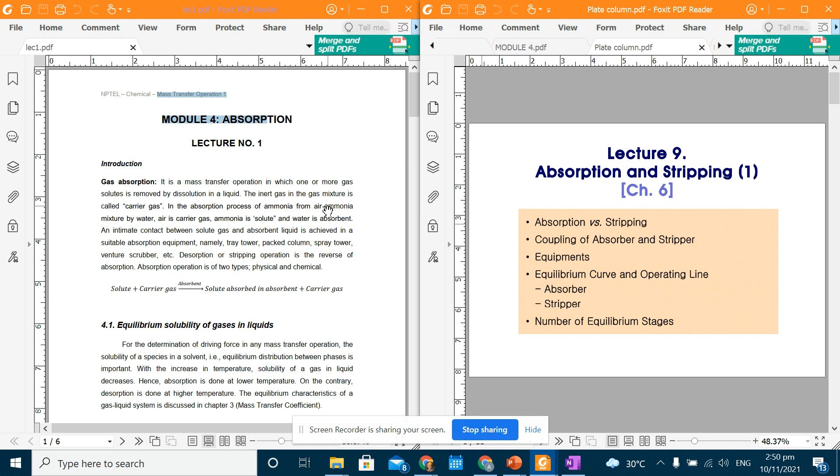So basically absorption is a separation process and a unit process at the same time, no. It is a mass transfer operation in which one or more gas solutes is removed by dissolution in a liquid. So, ibig sabihin, meron kang gas and then kukunin mo yung solute, no? And then i-dissolve mo rin siya sa liquid. That's the basic definition of absorption.

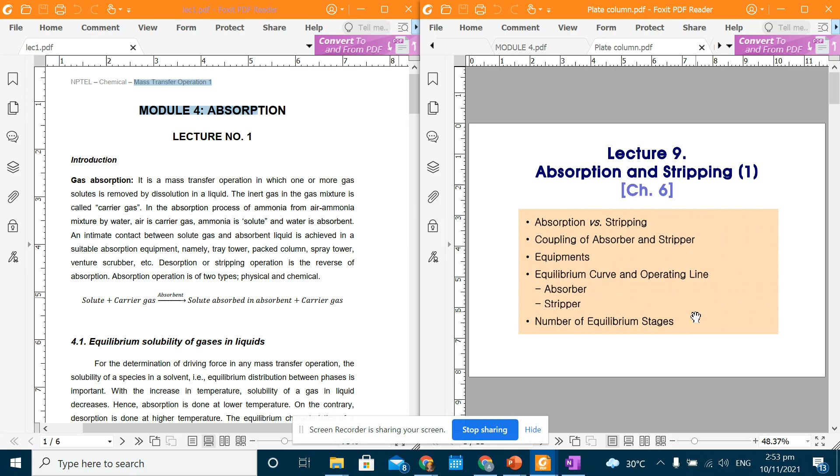So, again, same lang to sa sinabi ko kanina that absorption can also be termed as gas absorption, gas scrubbing, or gas washing. No? So, a gas mixture is contacted with liquid, which is the absorbent or the solvent, to selectively dissolve one or more components such as the solute or the absorbate. So another term for solute is the absorbate, by mass transfer from gas to liquid.

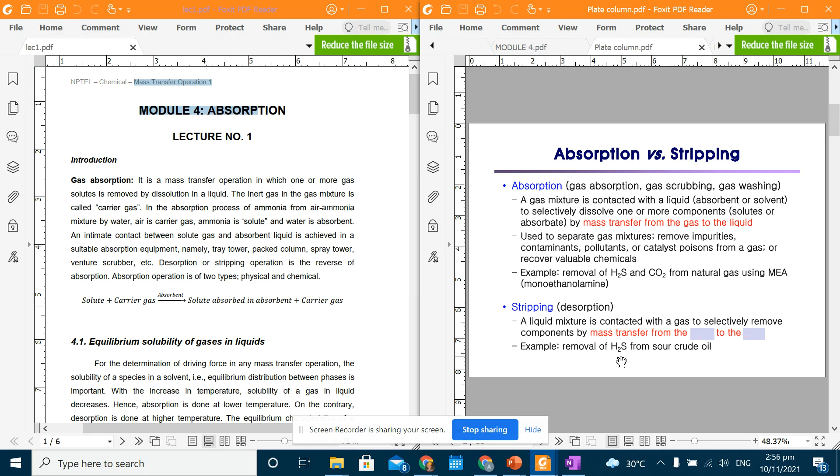Sa stripping naman, again, the liquid mixture is contacted with a gas to selectively remove components by mass transfer from the liquid to gas. No? Ito naman, sa stripping from liquid papunta kay gas. For example, removal of H2S, no, sulfide, from sour crude oil. No?

So absorbers are frequently coupled with strippers to permit regeneration or recovery and the recycling of the absorbent. So for example, here, you have a flue gas containing the solute, and then ipapa-absorb mo siya. The flue gas will enter here, then will go out at the top. Ngayon, yung solute mo will come in contact dun sa absorbent mo, which is usually liquid, and then makukolect siya dito. Okay? So the liquid that will be collected here will contain the solute na.

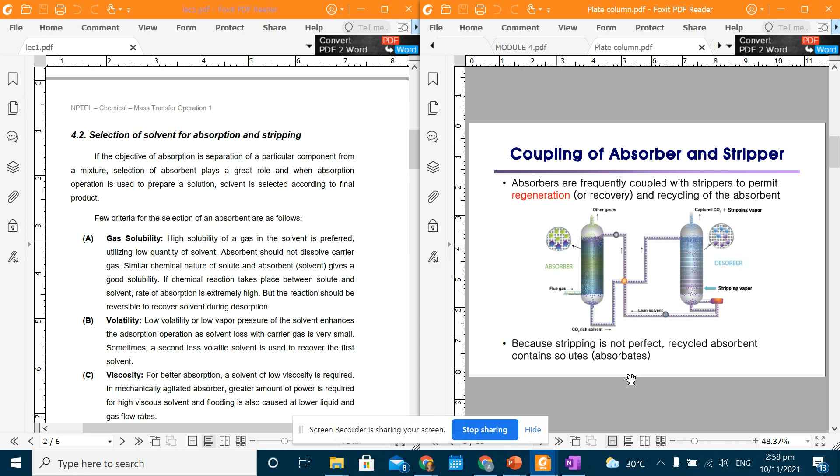Okay, so how do we quantify the effectivity doon sa pag-absorb mo or pag-strip mo? So, we have this absorption factor and stripping factor na tinatawag. This is just parang introductory lang sa absorption and stripping natin. For example, if you have absorption, it's a plate column actually. Ibig sabihin, meron ka mga plates dyan. It's a plate column. And then you have a feed gas.

Always si feed gas, it comes from the bottom of the column. So bottom of the column, doon pa si feed gas. If the feed gas is 25 degrees Celsius and at 1 atm, ito yung parang mga amounts ng different constituents mo, no? So argon 6.9, oxygen 144.3, nitrogen is 536, the water is 5, and the acetone is 10.3.

So automatically we can just say that this is air, no? Meron kang oxygen and nitrogen. So this is presumably air, and then meron kang water. So sa air mo, it has water vapor, and yung solute mo is the acetone. Naka red box na rin siya, acetone.

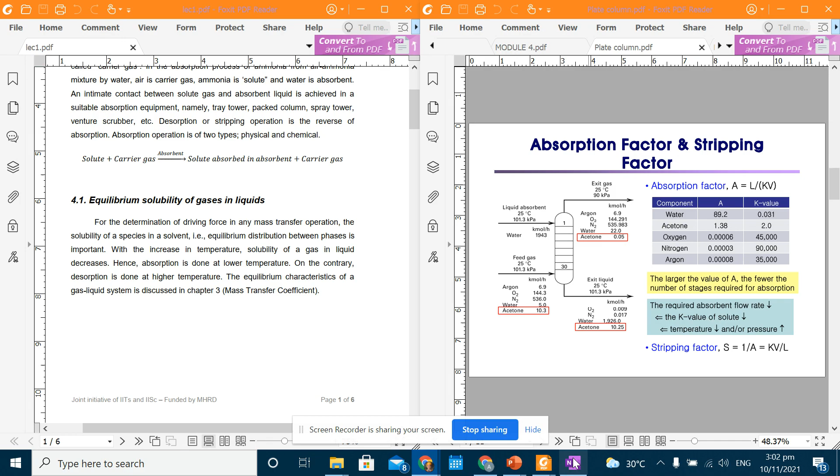Okay, for example, here, the total natin dito, the molar flow rate, or the L, the molar flow rate of the liquid is the sum of the liquid. And that sum of the liquid is around 702. Pag i-add mo, 702.5. This is in kilomole per hour.

And then what goes up here is, again, this is L0. Then this is the L1. Later on, ipapakita natin yung notation natin dito, ha. Hindi ko na nalalagyan. So, L here is equal to 704.2.

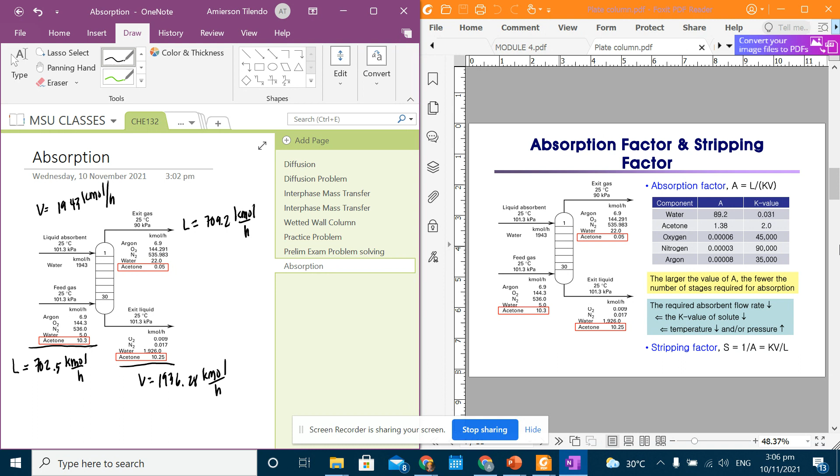So ano ba yung mga equipment natin? Meron tayong mga various types of tray or plate towers for absorption natin. Meron tayong tinatawag na tray tower. So si tray tower, also known as the sieve tower. Hindi kasi maka-annotate sa PDF eh. So, the tray tower, also known as the sieve tower, i-note lang dito.

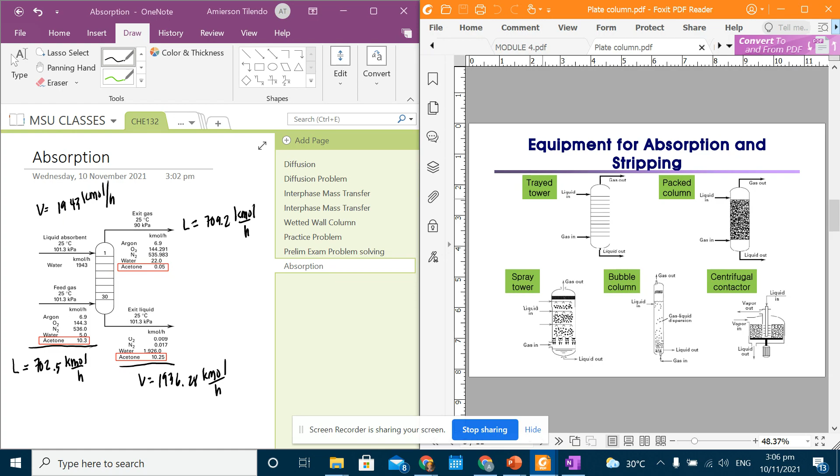Yes. And then, meron tayong packed column. Babalikan ko pala. Si tray tower is also known, mali pala yung sinabi ko kanina, as plate column. It's because it's a column consisting of different plates. So this is first plate, second plate, third plate, fourth plate, and so on and so forth. So plate column siya. Si packed column naman is also called packed tower.

Packed tower. So ang pinagkaiba nila, automatically ito, meron mga different plates dyan na dyan papasok pababa si liquid mo, si gas mo pataas. So kung mas marami kang plates, mas marami kang chances, opportunity para mag-contact si liquid and gas. Yun yung pinaka-importante sa absorption. Dapat mabigyan mo ng opportunity na mag-come in contact si liquid pati si gas.

Otherwise, wala kang mass transfer na mangyayari. So, ang kailangan mo lang talaga, makapag-come in contact. So, kung marami kang plates, mas maraming chances na mag-come in contact. Okay? So, we also have packed tower, also known as packed column.

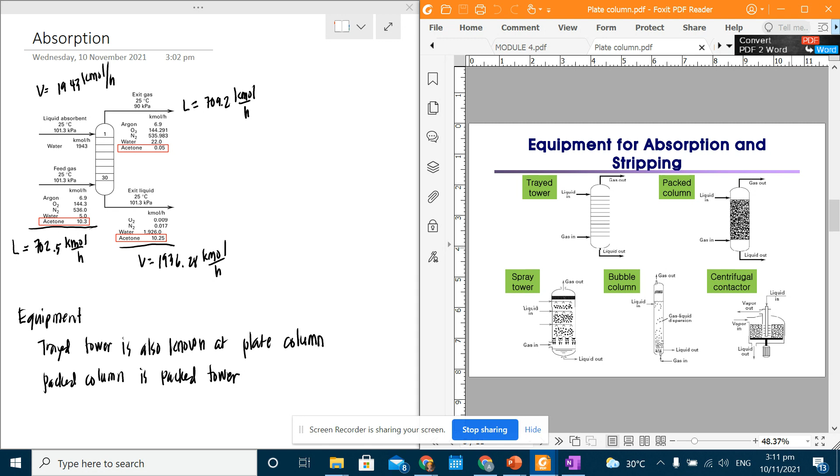Ang tinitingnan naman dito ang height, kung gaano kataas yung packed tower mo. This one, kung gaano kataas to. So kung gusto mo ng mataas na packed tower, marami kang makaka-come in contact, and then mas marami kang makukuha na solute sa liquid mo. No? So it really boils down to the cost, kung saan mas barato. Okay, sir.

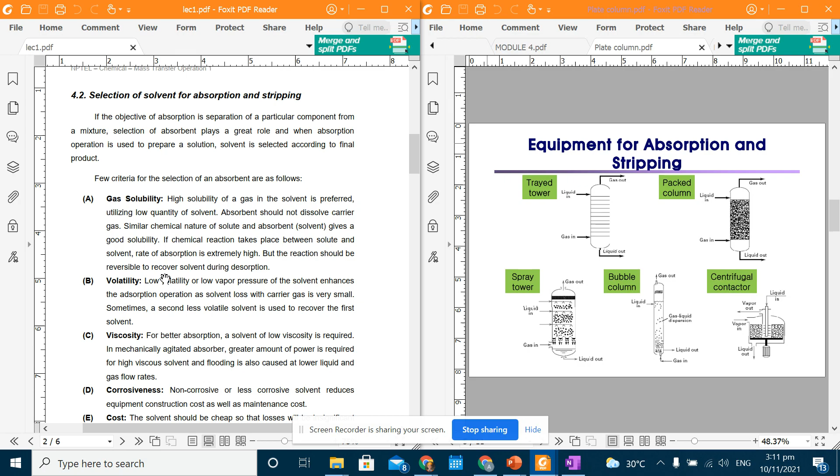Yes. Anyway, this is one of the selection, no, to give you the idea. Later on, i-discuss natin to. If the objective of absorption is to separate a particular component from a mixture, selection of the absorbent plays a great role. And when absorption operation is used to prepare a solution, solvent is selected according to the final product. So ito yung mga criteria na kailangan natin sa pag-select ng absorbent natin.

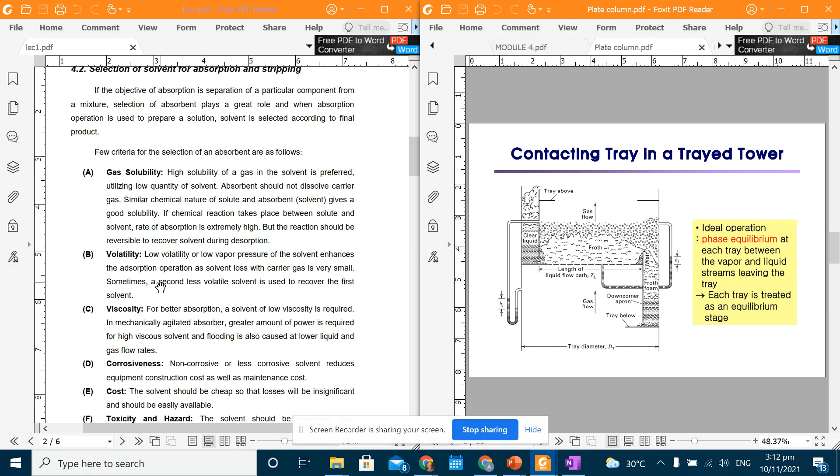For example, yung gas solubility niya, high solubility of the gas in the solvent is preferred. Dapat yung solute mo madali siyang ma-absorb doon sa solvent mo. Dapat low volatility siya, no? Hindi siya easily nag-volatilize, otherwise sasama siya sa gas stream mo going outside.

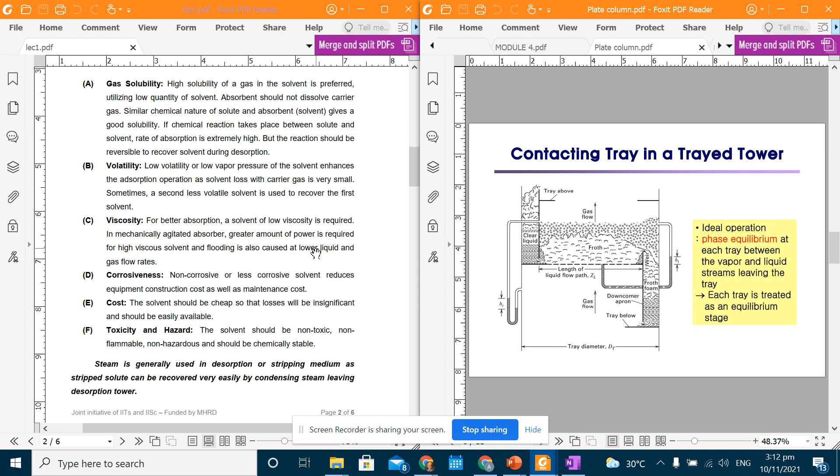Dapat low viscosity siya. Why? It's because kung yung solvent na gagamitin mo, mataas yung viscosity niya, mahirapan siya mag-flow down. Mahirapan siya mag-flow down, so naapektuhan doon yung come in contact ni liquid and the gas mo.

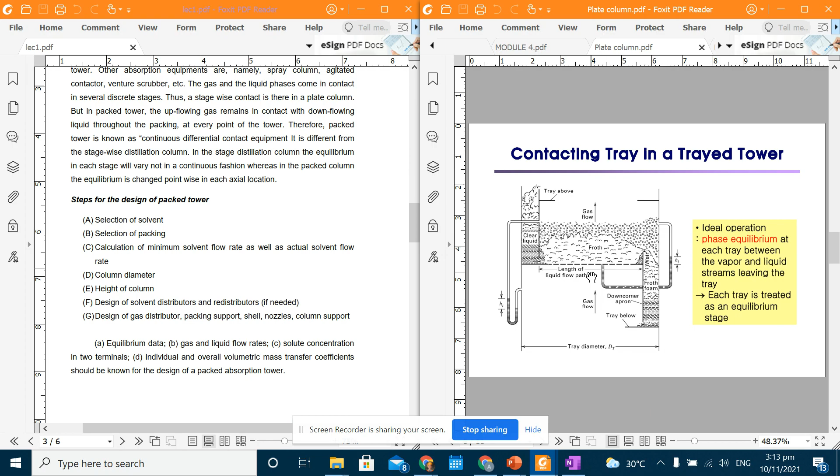Dapat non-corrosive siya kasi this equipment needs very high strength materials. And yung mga high strength materials natin are metals, and these metals are very prone to corrosion. So kailangan yung solvent mo hindi siya corrosive. Then dapat yung cost ng solvent mo mababa lang, cheap lang siya. Toxic and hazard: since it is industrially scalable, dapat maliit lang yung toxicity and hazards ng solvent. Okay, so yun yung mga criteria na ginagamit natin sa solvent natin.

To give you a more visual description doon sa nangyayari sa tray tower natin. Okay, so we assume that the liquid comes from the top. So ngayon, yung clear liquid mo will go here, and then yung gas mo will flow from the bottom to top. So since yung mga tray tower mo ay meron siyang mga holes here, no?

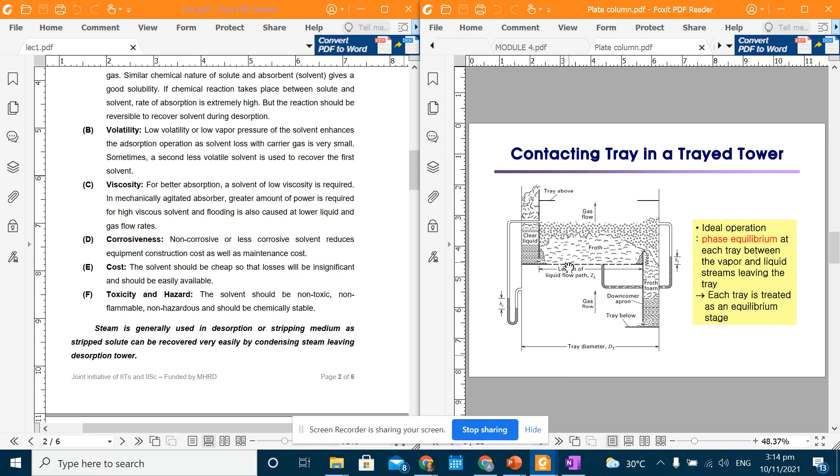Meron siyang mga holes. Okay, so itong mga holes na to, it usually ranges from 3 to 12 millimeters in size, no? Nasa Geankoplis yan actually. Or usually nasa 5 millimeters. So, unahin natin si tray tower.

Let's give a definition and description of the plate column. So the plate column will look like this, and it has holes. The holes are usually 5 millimeters in diameter.

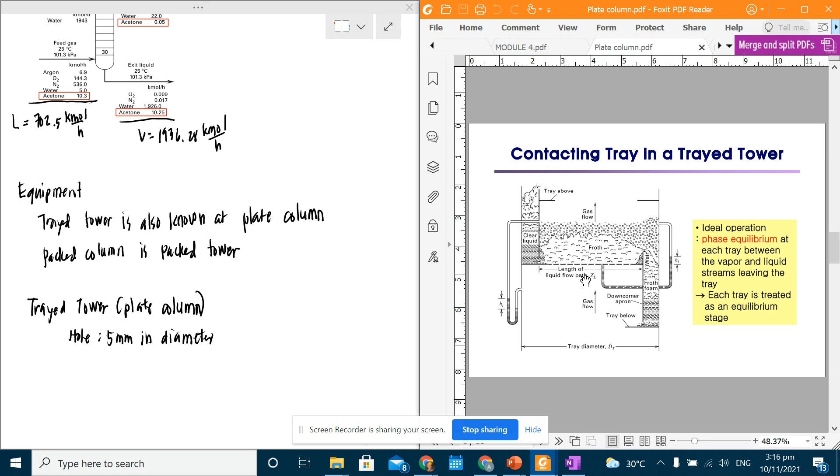It goes down, and then the liquid goes down, hitting the next tray, the second stage or second plate below. And it keeps going down, down, down.

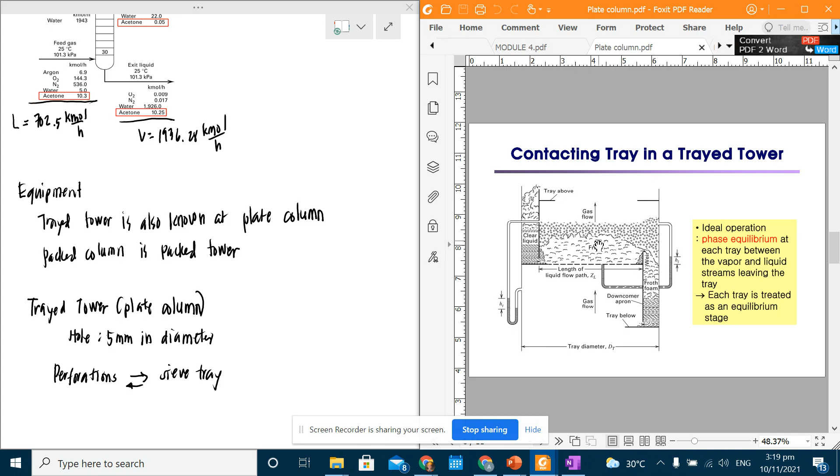The overflow liquid flows into the downspout to the next tray below.

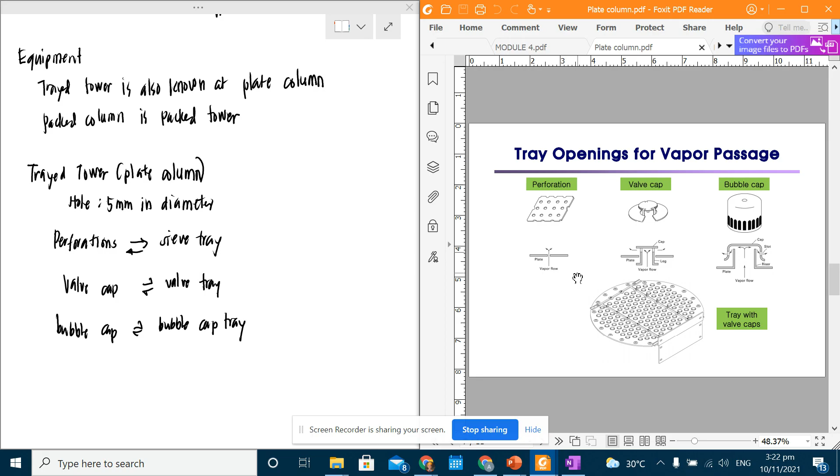In the periphery of each cap, dito in the periphery or parang in the perimeter of each cap, nagkakaroon ka ng bubbles na pwedeng mag-come in contact into the liquid. So yun yung mga tray openings natin sa plate column natin.

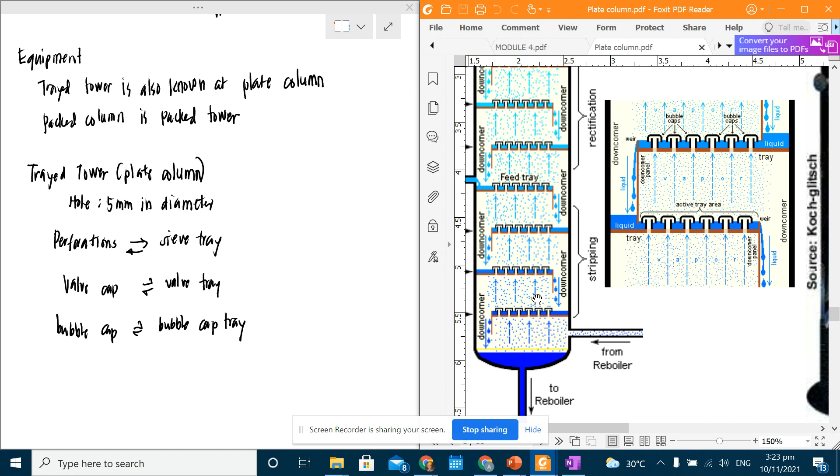So this is also another viewpoint doon sa bubble cap natin. Saan ba dito? This is the liquid and then this is the feed na vapor mo goes up. Yung pag goes up niya, tatama siya dito sa mga bubble cap, and then magka-come in contact siya sa liquid. Magkakaroon ka ngayon ng contact ng liquid and vapor here. Meron kang formation of bubbles on the periphery, sa gilid ng mga bubble cap. And then goes up, and then so far yung liquid mo goes down.

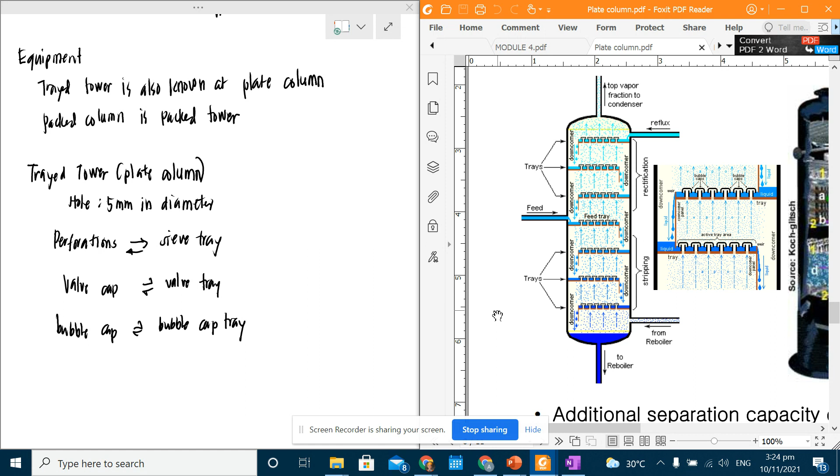Okay, so ano pa ba? This is a parang more detailed na itsura nung plate column natin.

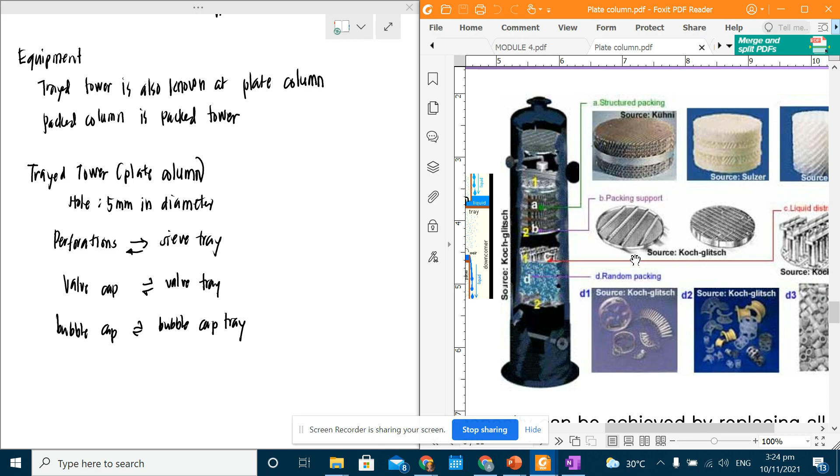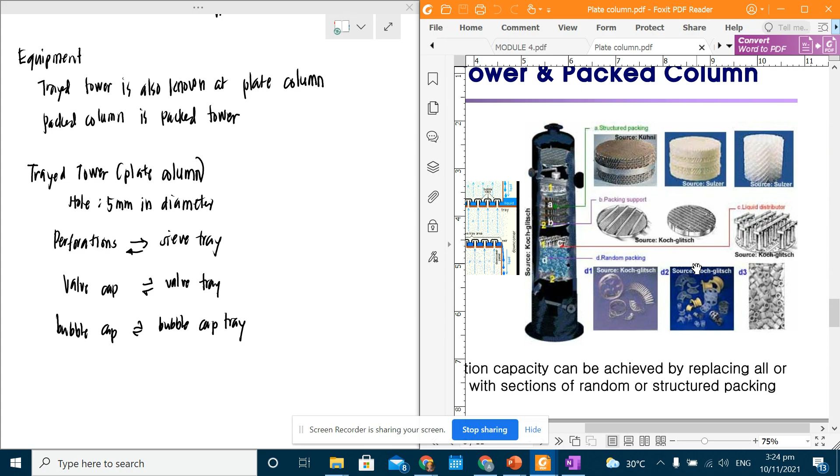And then this is the pack tower. Ito naman is pack tower. Hindi, pack tower ba to? Yeah, it's a packed column. So meron kang packing, na ibig sabihin ng packing, yung mga materials mo, instead of plates, nagkakaroon ka ng mga materials na kung saan doon nagtatama-tama si liquid and si vapor. So these are the common materials na ginagamit sa packing.

Additional separation capacity can be achieved by replacing all or some of the trays with sections of random or structured packing. So instead of the trays, you have a structured or random packing. Pero hindi mo naman pwede na parang i-condense, i-pack talaga yung mga materials mo kasi hindi dadaan si air mo or si vapor mo. Yung vapor pressure mo, yung pressure drop mo, sobrang laki nun.

Kailangan yung parang there is a dichotomy kasi sa packing na kailangan papass through si vapor or si gas doon sa packing mo. At the same time, meron kang contact ng liquid and si gas mo. It's quite complicated to think na ang purpose mo is lalabas si air or si vapor at a minimal pressure drop. Pag sinabi nating minimum pressure drop, mabilis yung pag-pass through ng air. Yung pressure dito must be somehow almost equal sa pressure dito, maliit lang yung pressure drop mo. That's a very good indication na the packed column is efficient. At the same time, kailangan mo magpa-come in contact si vapor or si gas kay liquid. So there is a parang contrasting idea there.

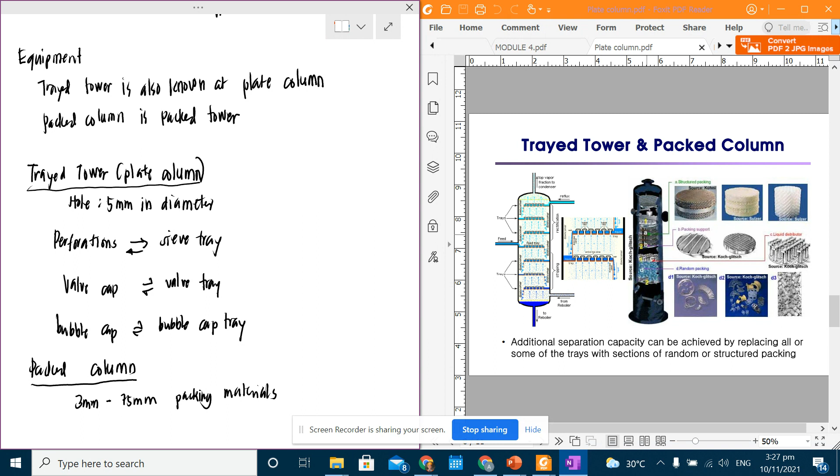Most tower packings are made of inert, cheap materials such as clay, porcelain, graphite, and plastic. Void spaces of 60 to 90% are characteristic of a good packing, so our packing materials should have large void space. As much as possible, air should be able to pass through without getting blocked. Once the air gets blocked and cannot pass from the bottom, the packed tower is not good. So we need materials that are loose enough to allow air to pass through.

The packing permits relatively large volumes of liquid to pass countercurrently to the gas flow through the opening with relatively low pressure drop for the gas. That's what we want here, a relatively low pressure drop. Once the pressure drop is large, it means there is blockage in the packed column when the pressure drop is high.

The same type of packing is also used in vapor-liquid separation processes such as distillation. Okay, so what does the usual appearance of these look like?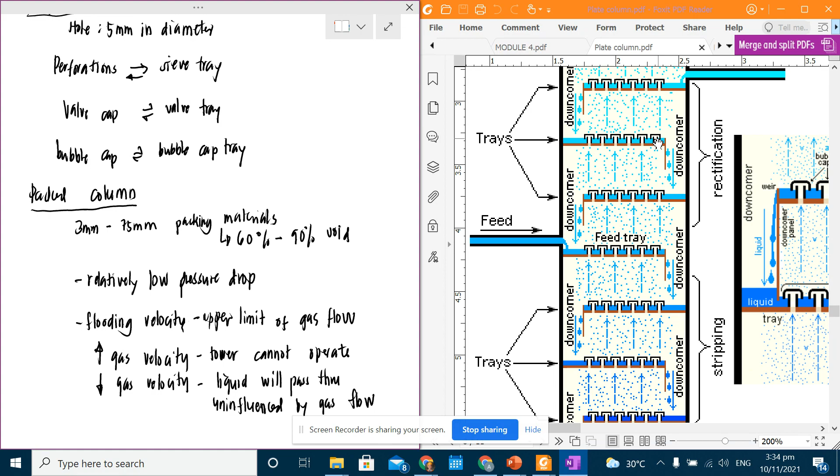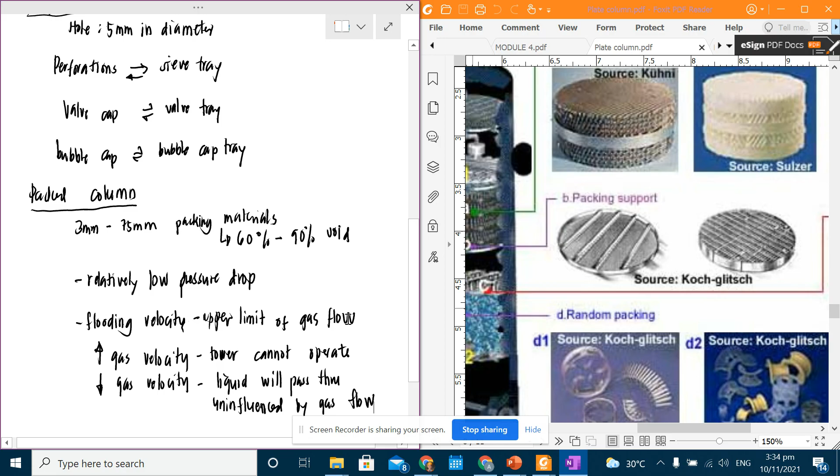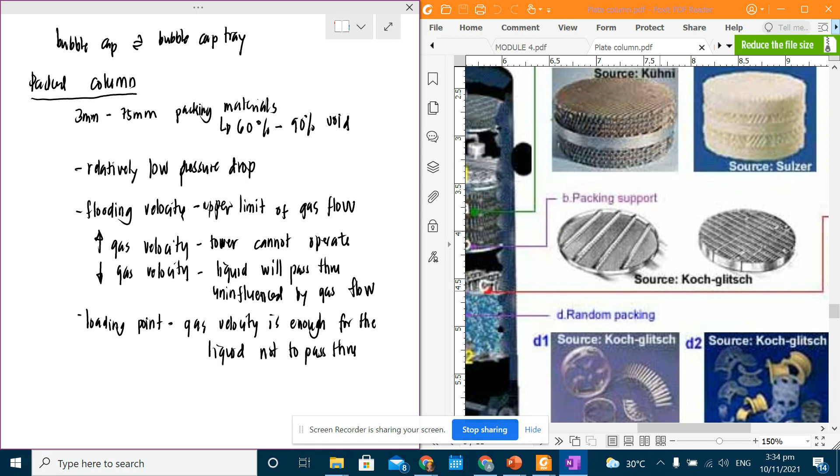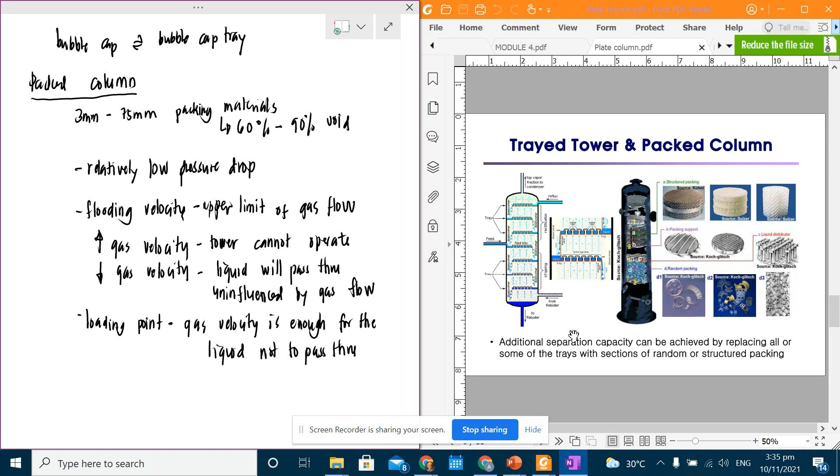As the gas flow rate increases to what we call the loading point, the gas starts to hinder the liquid downflow, and local accumulation of pools of liquid starts to appear in the packing. So we have what is called the loading point, where the gas velocity is just enough for the liquid not to pass through automatically, so that there is still contact happening. That's the essential thing we have to remember about tray towers and packed columns.

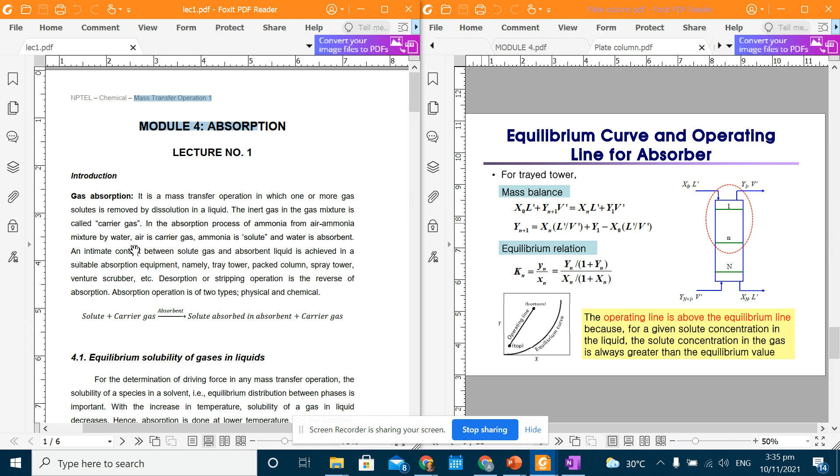So, design of a single stage countercurrent packed tower. Later on, or next week na lang, natin i-discuss si equilibrium curve and operating line of the absorbers. Let's just look lang doon sa mga concept lang natin, no? Yung mga concept lang natin here.

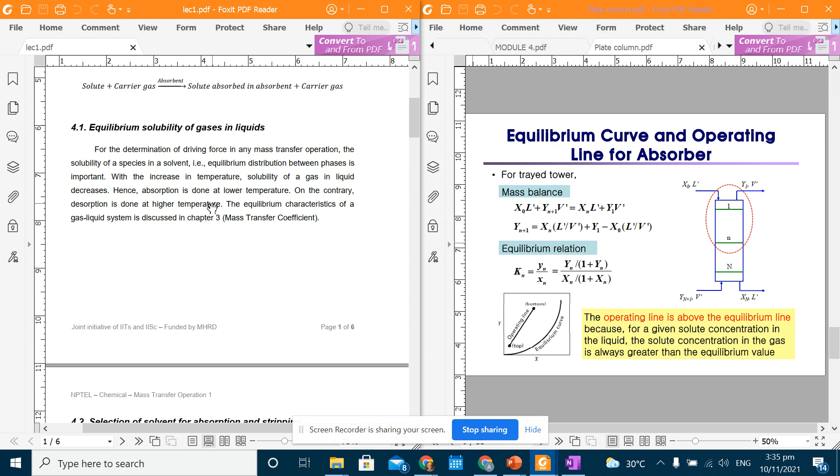So for the driving force of any mass transfer, the solubility of a species in a solvent, no? With the increase of temperature, the solubility of a gas in a liquid decreases. No? So, ibig sabihin, kailangan ipababa mo yung temperature. No? Automatically, kung mataas yung temperature mo sa loob ng plate column mo or sa tray column mo, hindi maganda yung pag-transfer ng solute from gas to liquid. So, mababa yung solubility niya. So, dapat may maintain ka rin na temperature sa loob.

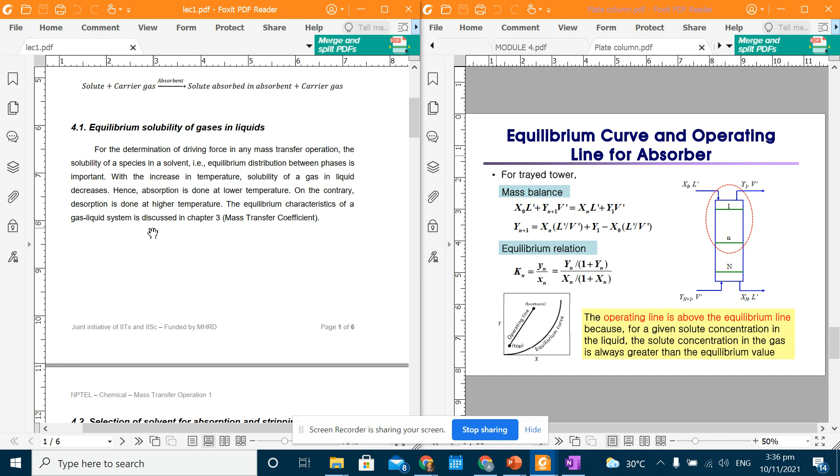On the contrary, desorption is done at higher temperature. No? Dapat yung pag-desorb mo, yung pag-strip mo, higher temperature. Yung pag-absorb mo, lower temperature.

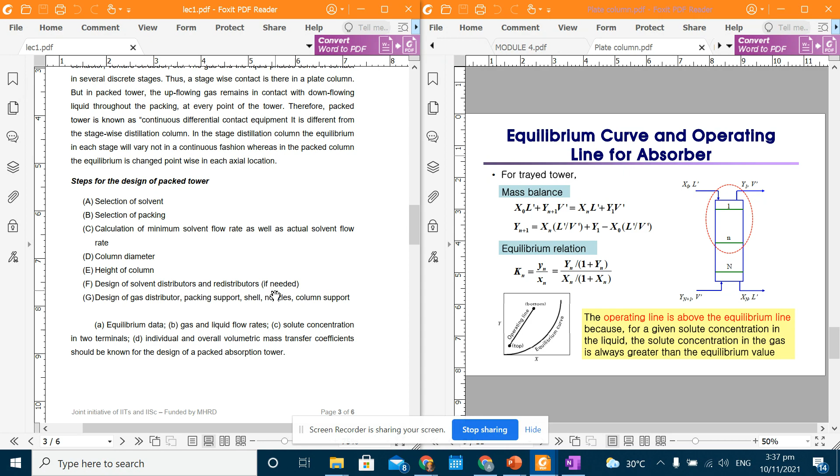So, design of the single stage countercurrent flow absorption tower. These are the steps. You have to select the solvent, you have to select the packing, you calculate the minimum solvent flow. So ito yung sinasabi nating flow ng solvent or nung flow ng gas. Kailangan malaman natin 'yon. Kasi ayaw natin magkaroon ng flooding, no? Dapat nasa loading point lang tayo. Column diameter, nakaka-apekto pa rin yun sa geometry natin. Height of the column, design of solvent distribution, design of the gas distributor, packing support, shells, nozzles, column support.

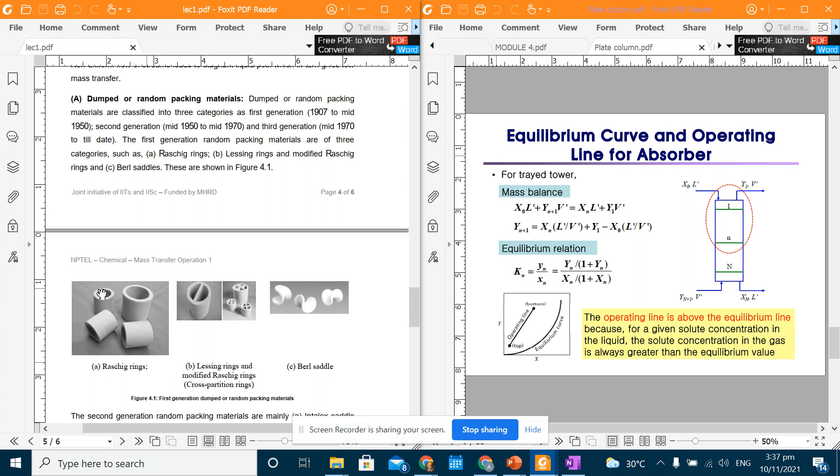So ito yung sinasabi ko kanina na mga packing materials natin, no. Pwedeng Raschig ring, itong mga ring lang natin, i-dump mo lang siya as a packing dito para magiging random packing lang siya. We have Lessing rings naman, no. Ibig sabihin magkakaroon ka lang ng partition sa loob ng ring, and the Berl saddle, mga saddles. Ang kailangan lang talaga dito is meron siyang enough na surface area. Kailangan mataas yung surface area to volume ratio niya, na maraming surface kung saan magtatama si liquid and si gas. No? Maraming contact area.

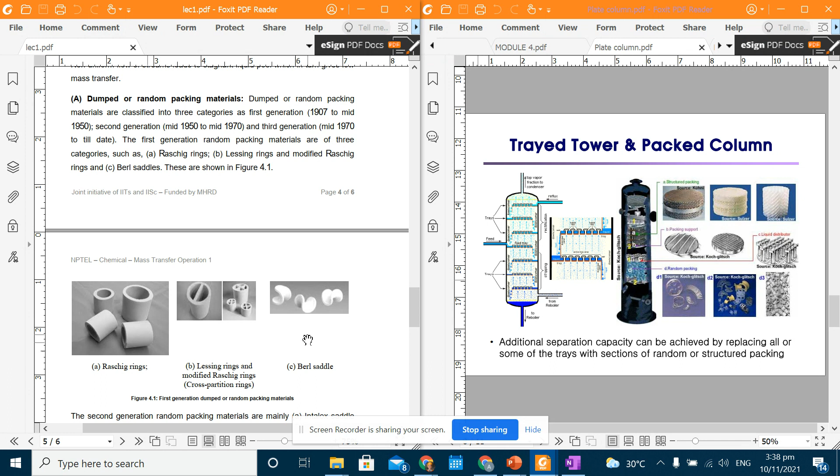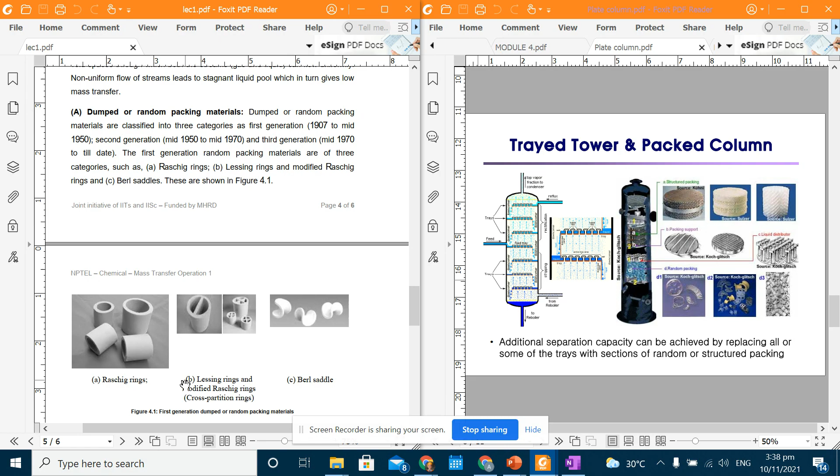So, meron tayong Intalox saddle and modification and the Pall ring. The Pall ring and the modification. So, maraming type ng packing and merong different parameters intended for each of the packing materials na ginagamit dito.

So, ito naman yung criteria paano kami pumili ng packing materials. Dapat yung cost niya, low lang. Surface area, again, sinabi ko to kanina, dapat mataas yung area niya. The void volume must maintain a low pressure drop. Hindi pwede na yung material mo will cause pagbabara. No? Dapat maliit lang yung pressure drop natin. Fouling resistance, dapat hindi siya nakakatrap ng mga suspended solids. Kaya kailangan mataas yung surface area niya, at the same time, hindi ka nakakabara, no?

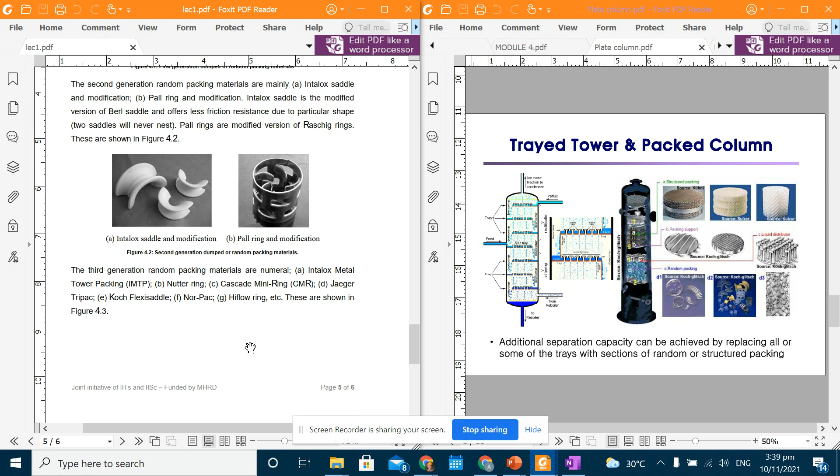Mechanical strength, no, since merong mga pressure drop na tatama diyan, kailangan yung packing material mo has a high or good mechanical strength. Uniform flow of streams, dapat yung pag-stack mo pwedeng random and then pwedeng uniform, something like a structured packing.

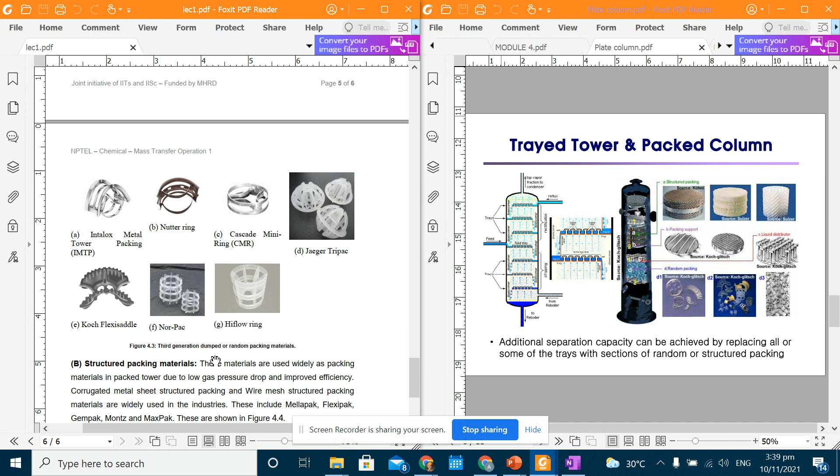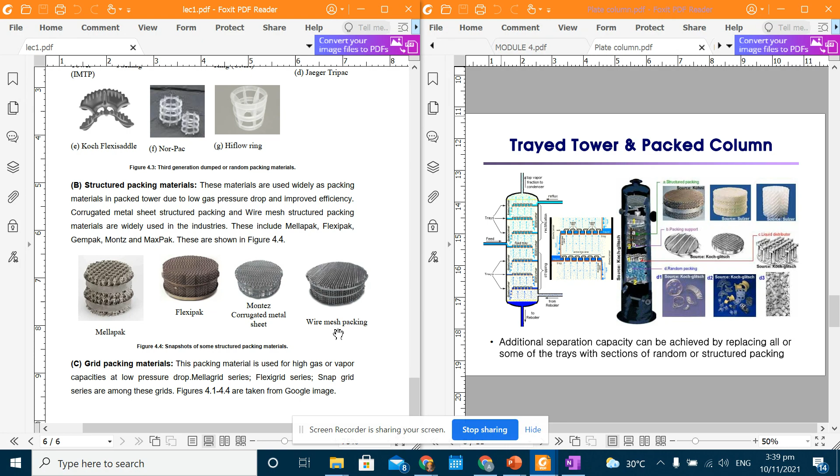Oh, marami pa palang packing dito. Meron third generation dumped or random packings. We have the Intalox, Nutter ring, Cascade, Jaeger, Koch, Nor-Pac, Hiflow Ring. Yun yung si random. Pag structured packing naman tayo, pwede tayong Mellapak, Flexipak, Montz corrugated metal sheet, and wire mesh packing. So, dalawang type ng pag-pack natin doon sa packed column: the random or the dumped, and the structured packing natin.

Pwede tayong mag-grid, no? Magkaroon ng mga mesh naman. This packing is used for high gas or vapor capacity at low pressure drop. So kung sobrang taas ng pressure mo na incoming pero gusto mo mababa lang yung pressure drop mo, magkakaroon ka ng grid packing. Pero the problem sa grid packing is maliit lang yung area kung saan they come in contact. Okay, so naapektuhan yung efficiency natin doon.

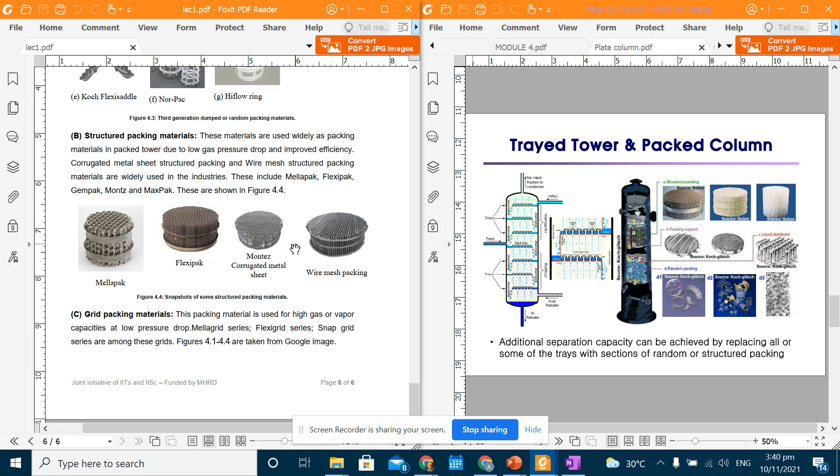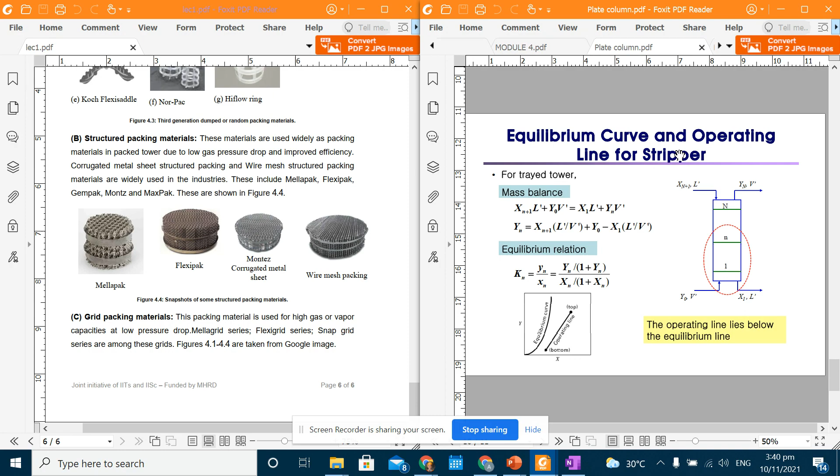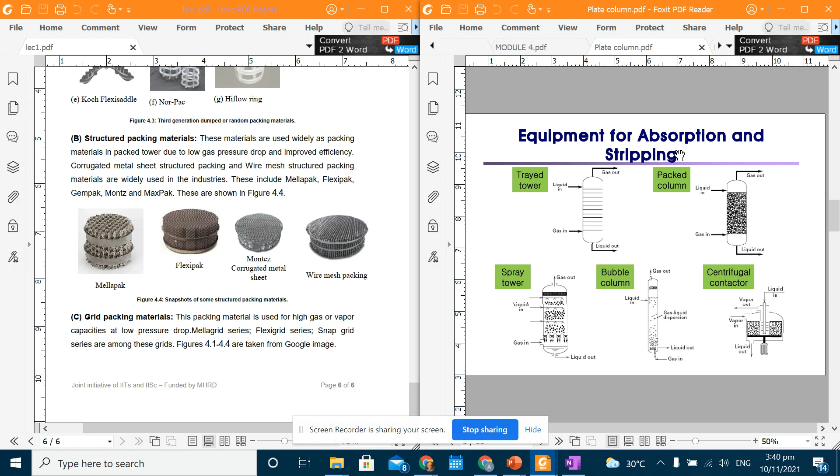Okay, so next meeting, let's discuss equilibrium curve and operating line for absorbers, the number of equilibrium stages, and other details. Especially, mag-discuss tayo sa single and multiple equilibrium contact stages. Do you have any questions sa absorption natin, sa basic ideas sa absorption?